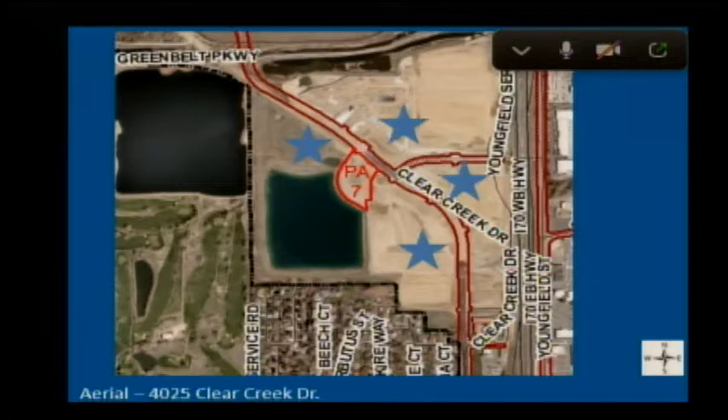A user has not yet been identified for the lot directly southwest, but the Lifetime site is just south of that. The internal roadway system and utility infrastructure connecting Hampton and Lifetime are on the west side of Clear Creek Drive, are moving through the permit process, and will likely be constructed in summer of 2022. Coors Pond lies directly to the west.

The subject site is located on the northern portion of Clear Creek Crossing Plan Development in Planning Area 7, which is also called the Harvest District, denoting this area as a commercial sub-district of the development. The site is surrounded by mixed use and commercial plan development zoning to the north, west, and south.

This request for SDP approval is the second step in a two-part process pertaining to plan developments. The first step occurred in 2018 when Planning Commission and City Council approved the Clear Creek Crossing Plan Mixed Use Outline Development Plan, which established the zoning. The zone change also included approval of a vision book that establishes the intended design and architectural themes and materials, as well as a design pattern book that includes the more substantive development regulations.

An Architectural Control Committee, or ACC, was established specifically for Clear Creek Crossing development to ensure compliance with the design pattern book, third-party review, consistency across the planned project, and to conduct schematic design review prior to the city's planning review. It's comprised of members of both the developer and city. The ACC has provided their recommendation of approval, which is attached in your staff report.

The applicant is requesting to build a 70,217 square foot, 4-story hotel on 3.59 acres. It's in Planning Area 7, or the Harvest District of Clear Creek Crossing, which includes the subject site. I'll show all of this that's outlined on the screen in more detail in the next few slides. The site does take into consideration adequate vehicular access, planning area connectivity, connections to the trail, and pedestrian connections to the north and south.

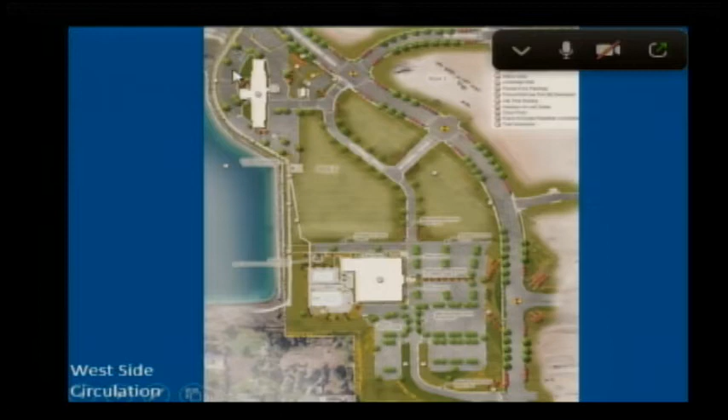A shared access connection is also provided to the south and to the west to provide that planning area connectivity. The site will also connect to the planned trail network on the west side.

The building is located central to the site and surrounded by a looped drive and parking. The SDP reflects 140 proposed parking spaces, including 5 accessible spaces and 20 bike parking spaces. The parking surrounds the building and is screened from Clear Creek Drive by landscaping. The Denver Water easement traverses the site along Clear Creek Drive, so this big easement there, which limits development in this area but allows for parking.

Bike parking is split between the 3 locations near the building, near the trail, and along Clear Creek Drive. The amount of parking provided complies with the design pattern book.

In terms of building orientation, there are no build-to requirements in Planning Area 7 within the Harvest District because of the grades and because of the Denver Water easement. A 20-foot setback is required along all sides. Setback requirements are imposed by the design pattern book, and the hotel complies with these standards. The primary building entry faces to the east, and usable areas for hotel residents lie on the west side. The SDP also complies with all grading, drainage, utilities, and traffic plans for the overall Clear Creek Crossing development.

Sanitary sewer and water service will be provided by Applewood Sanitation District and Consolidated Mutual Water Company, respectively. All internal site utilities will be privately owned and maintained by the Longs Peak Metro District and placed in utility easements, which are generally located beneath the drive aisles.

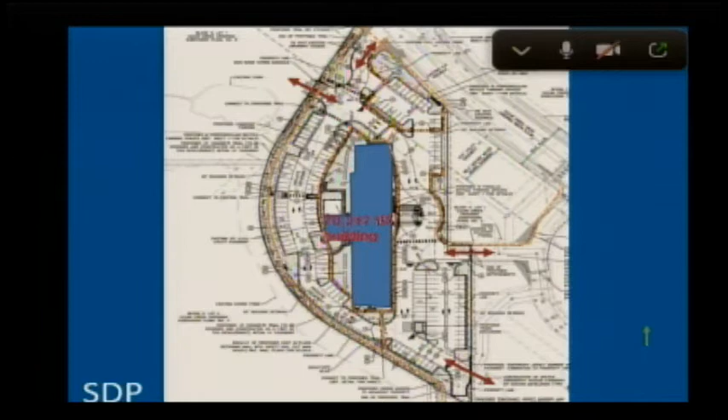A retaining wall borders the site to the southwest, starting approximately here, that's approximately 5 foot tall at its highest point, to be constructed to avoid steep slopes and provide a safe transition to the trail. Trail connections are proposed along the west side of the site and will be constructed by the master developer, Evergreen, under separate permit.

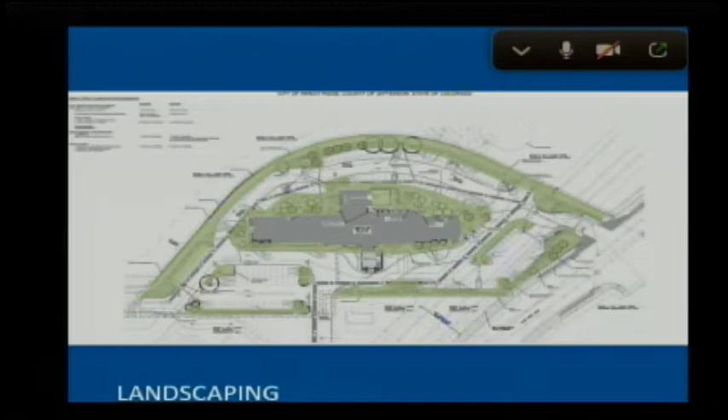The architectural style is driven by the Clear Creek Crossing Design Pattern Book and Vision Book, which calls for a modern agrarian aesthetic that blends traditional agrarian forms and materials with a modern feel. It also requires strong attention to be paid to the pedestrian realm.

The building is proposed to be approximately 57.5 feet tall, and the architecture is comprised of primarily brick, stone, wood, and cementitious siding with EIFS accents on the upper stories. The materials carry over on all sides of the building, resulting in four-sided architecture.

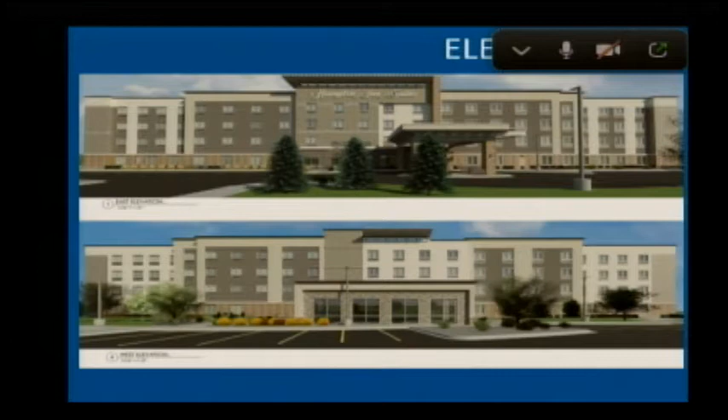The building contains a stone base to enhance the pedestrian realm, wooden awnings with corbels to enhance the entries, and ties into the agrarian theme. The western elevation incorporates similar stone and brick elements and wood accents as the front to improve the view from the trail. Overall facade transparency on the street-facing facade meets the requirements of the design pattern book. An analysis of the architecture in compliance with these standards is provided in the attached specific development plan.

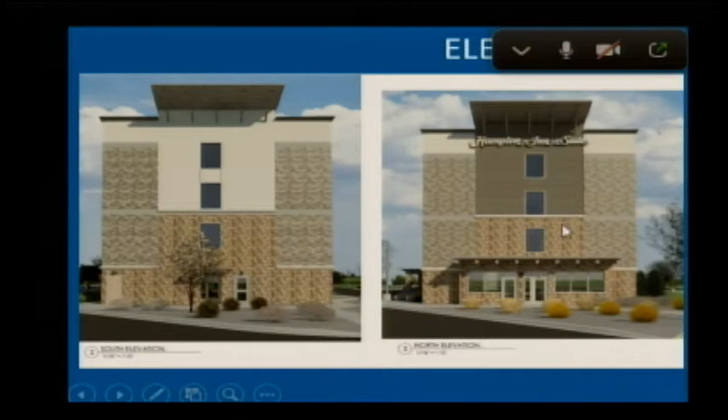Since Wheat Ridge is not a full-service city, we sent the application on referral to outside agencies as well as completed our internal review. We did not receive objections from outside agencies, and coordination with those districts is ongoing. Civil construction documents are nearing approval, and the plat is currently under review. A recommended condition of approval has been added to require the development agreement along with the SDP, mainly to memorialize the obligation for public improvements.

Before the hearing, the property was posted for 15 days, and letters were sent to property owners and residents within a 600-foot radius. The project was also posted to Wheat Ridge Speaks. One comment was received related to the perceived departure from the overall vision of Clear Creek Crossing. I'll let Evergreen respond to this comment during questions and answers, but to address it briefly, we do have the regulatory tools in place, and it just will take time to get there, but the vision is there, and we have the zoning as well.

So with that, staff finds that the SDP is consistent with the ODP and is in compliance with all standards set forth of the ODP, Clear Creek Crossing Design Pattern Book, and City Code. The SDP is consistent with the purpose of a planned development, and all agencies can serve the property. Therefore, staff is recommending approval of the specific development plan, WZ 2001, with the condition to require a development agreement.

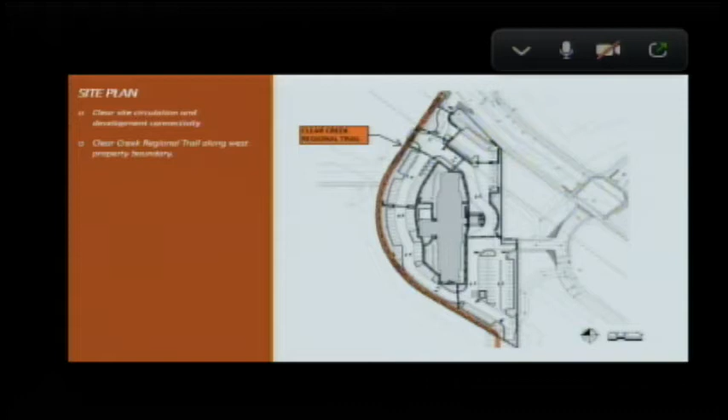Pedestrian and bicycle connectivity was an important factor in the site design. The Clear Creek Regional Trail proposed with this project has been made an integral part of the surrounding development by connecting Clear Creek Drive to the rest of the Harvest District via a multi-use trail. The project provides pedestrian connectivity throughout the site that links Clear Creek Drive to the Clear Creek Regional Trail.

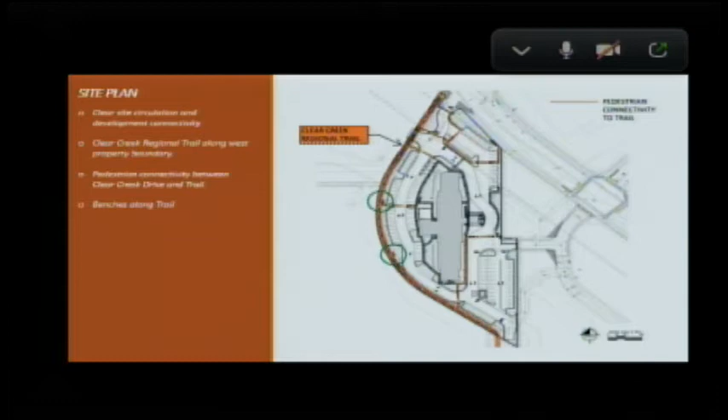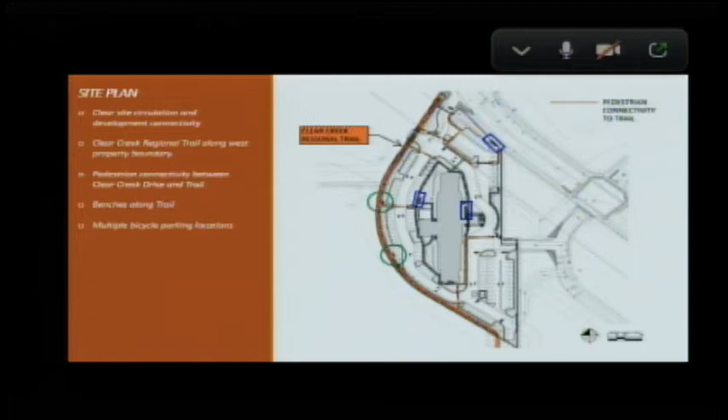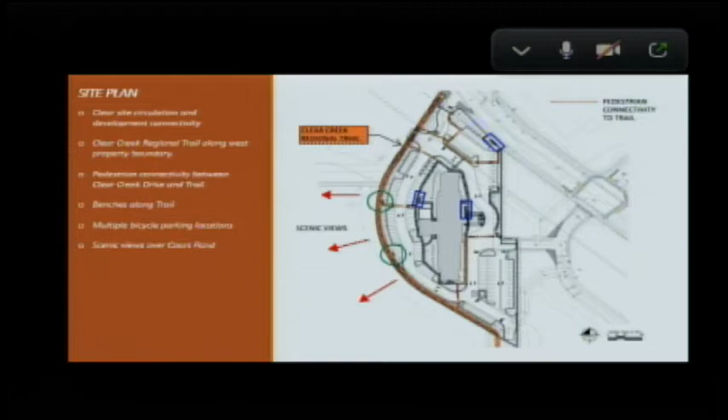The building orientation on the site provides scenic views of the Coors Pond and the Front Range skyline for 50% of the guest units, as well as the amenity areas, including the fitness room, the pool room, and the outdoor patio.

The project utilizes an enhanced landscape and site furnishing design. The site provides over 20% open space, which is in compliance with the minimum requirement for the Harvest District. Additionally, the site lighting fixtures and illumination were intentionally designed to complement the lighting of the surrounding development.

The photometric plan, which is included in the SDP package, provides substantial lighting for the parking areas and pedestrian paths, while limiting light pollution and intrusion onto other neighboring properties. Site furnishings have been selected in accordance with the design intent and theme of the design pattern book.

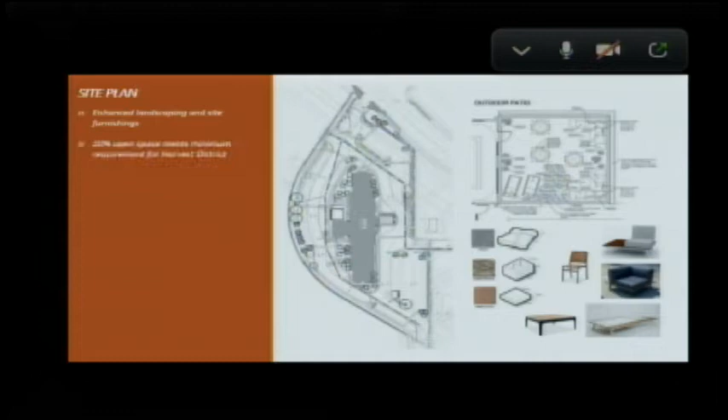The Hampton Inn Suites provides development continuity and a sense of place through building design. The building was designed with the modern agrarian design aesthetic of the development in mind and provides coherence with the landscape while accentuating the view corridor to the Coors Pond and the Front Range skyline.

The height of the building was kept 8 feet shorter than the maximum height allowed, which limits the effect on the view for the neighboring developments. The hotel height is similar to the height of the Lifetime Fitness Center at the southeast corner of the pond. The similar heights of these two buildings complement each other as anchors for the Harvest District.

A pedestrian-friendly street environment was emphasized with over 40% of the facade facing public right-of-way, being transparent to encourage pedestrian traffic throughout the site.

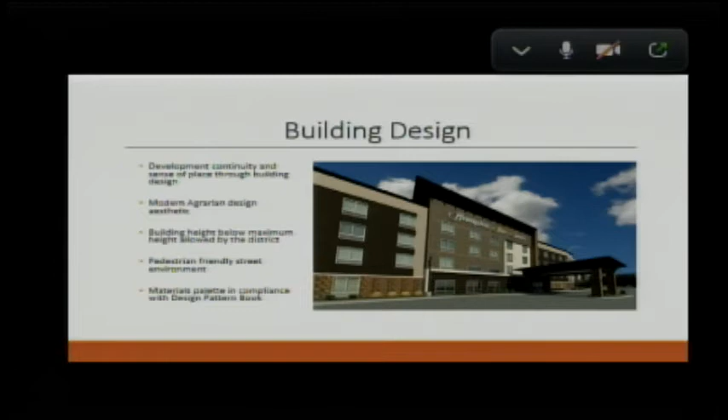The project utilizes a variety of materials to comply with the design pattern book. These materials include natural look river rock stone veneer, brick and EIFS in soft natural colors, with contrasting fiber cement panel siding representing dark toned wood.

The building is grounded by the natural stone base. Building corners are accented by the contrasting brick veneer, which provides visual anchors for each elevation. The long east and west facades are articulated by building massing with varying parapet heights and cornice projection details, as well as differentiating materials and colors.

The primary building entry location at the east elevation is emphasized by projection in building massing, use of the contrasting brick, and architectural wood roof canopy feature.

This entrance is further designated by a drive-under canopy with decorative wood cornice detailing to complement the roof structure. This canopy provides a clear, identifiable entry point for guests, while it provides shade and enhances the pedestrian experience.

Similarly, secondary building entry locations at the north and south are emphasized by extending the grounding stone base vertically to the third floor line and repeating the architectural wood canopy feature at the roof.

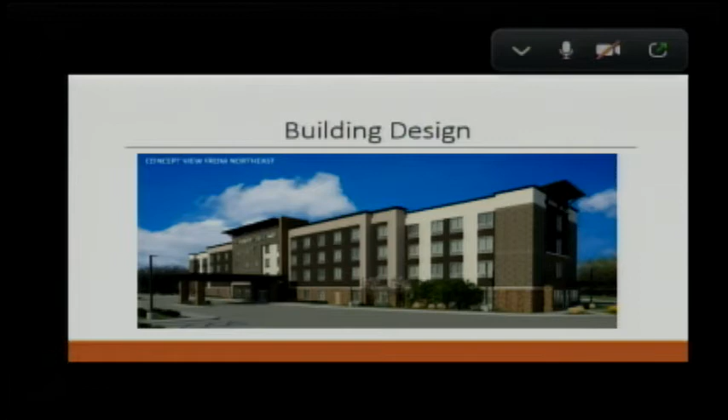With the north elevation facing Clear Creek Drive, additional detailing was provided. The wood look siding is used at the upper levels in lieu of EIFS, and an additional building projection with architectural wood canopy at the first level provides improved pedestrian scale and connectivity.

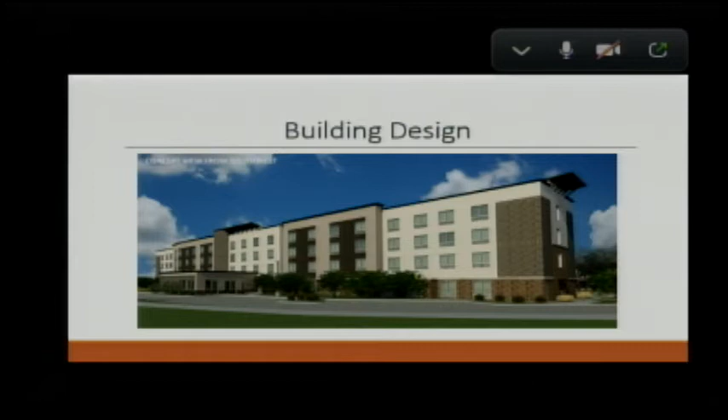The west elevation is the main view from the trail. The single-story pool building increases human scale for this facade. The central brick tower with an architectural wood canopy feature at the roof provide visual interest for pedestrians on the trail, as well as provides a cohesive, consistent design around all four sides of the building.

Inside the hotel, our front desk area will feature a welcome message designed to share the spirit of the surrounding community. Interior finishes are both modern and warm.

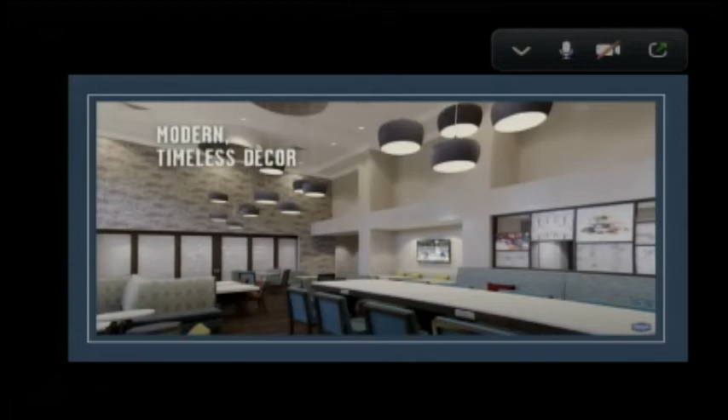Our gathering space features large windows to bring in natural light. Guests will be able to enjoy amenities such as complimentary coffee and breakfast, market, fitness room, and indoor pool. Everything about the Hampton Inn Suites is designed to make guests feel welcomed and comfortable, including our well-appointed rooms that meet the needs of families and business travelers alike.

In closing, Brent Hospitality Group does not take its commitment to your community or our team lightly. We bring a high level of integrity and a spirit of hospitality wherever we choose to grow. We are excited for this opportunity to make the Hampton Inn Suites a part of the Clear Creek Crossing development and look forward to answering any questions and presenting to the commission here tonight. If approved, we would like to break ground in late summer of 2022 and open the hotel in the fall of 2023. Thank you.

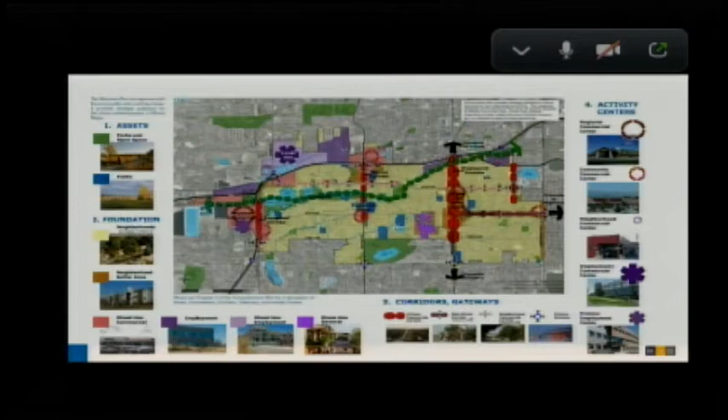When we start any planning process of this scale or this nature, we start with the comprehensive plan to look at what existing guidance is on the books for a particular sub-area. You can see here that a lot of the assets and foundational elements identified as part of the structure plan, which is intended to guide strategic future development for Wheat Ridge, are represented in this area, from neighborhoods and neighborhood buffer areas to a couple of key existing nodes around mixed-use commercial and employment. You'll see corridor designations for commercial corridors, both at the neighborhood and primary scale, as well as a few commercial centers distributed throughout.

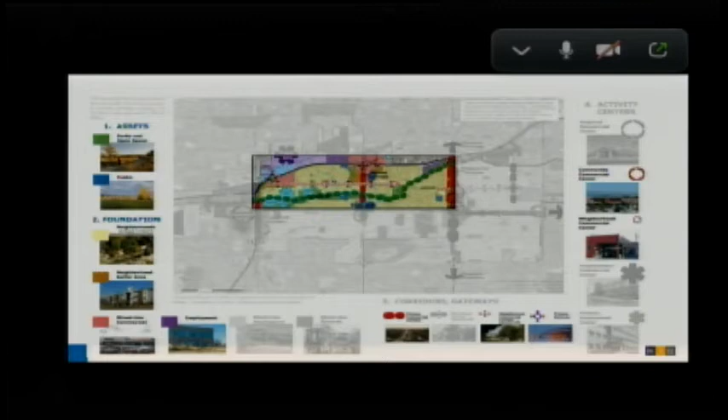Other plan documentation, it's been a few years now with the NRS. I don't need to tell you all about the NRS, but as it relates to this particular project, the priority recommendations that this project does a great job of implementing are around corridors and neighborhoods. One of those from the NRS was to complete a corridor plan for 44th Avenue from Wadsworth to Youngfield. We got close, right? But we are looking much more comprehensively at the interrelationship between the corridor and the surrounding land uses, existing neighborhoods, and the like.

And on the neighborhood side, designing neighborhood-appropriate based engagement. So it's taking the momentum and energy that the Let's Talk program first codified coming out of the NRS, and knowing that Fruitdale and Anderson Park were finishing up their engagement blitzes as we were getting underway, it was a great time to segue from near-term priorities and action items that the Let's Talk program identified to a larger long-term 20-year vision for a sub-area plan.

Another plan that we look to when we start is the existing plan documentation at a sub-area level. So the Fruitdale sub-area plan, which encompasses about a third of the overall geography that we're looking at. A lot's changed since this was adopted, right? There's been two recessions, there's been a global plague. So some of the context obviously has evolved.

That being said, a lot of those primary concepts are still the same issues that we're dealing with today. So it's concepts that were identified in the Fruitdale plan around revitalization and redevelopment of 44th Avenue, the desire to improve and maintain the conditions of properties both on the residential and commercial side throughout the area, prioritizing pedestrian safety and traffic flow, and then leveraging, as Jay mentioned in the approach to the project, those existing community assets from all of the great parks, Prospect, Anderson, Fruitdale, the historic park, Baugh House, all the great things that the area already has, using those as existing anchors to think about stability and change moving forward.

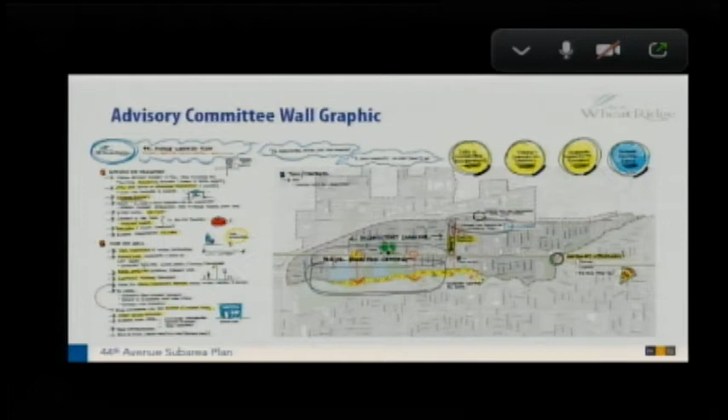Focus groups on a mural board, so a little more live transcription of important areas. You can see that clustering of orange, or concerned notes, over towards the truck stop. You can see other aspects these focus groups are noting in terms of importance of preservation and change.

The themes from those conversations were about supporting the existing character through compatible development and, where appropriate, preservation in certain areas; safe and signalized crossings along 44th, knowing that there's a 1.5 mile stretch of no signals from Kipling down to the on-ramp past Tabor.

Supporting and expanding on local retail - we have great businesses there today, but there's the idea that more business could be attracted to support the needs of existing community members, and we're working through all the ways to achieve that. As I mentioned, safety once more, and then that last piece: defining those areas of potential change or economic development to support either new residential or new retail, but maintaining a vision focused on character, safety, and experience.

Last few slides here on the engagement side, and I'll hand it to Jay to wrap up. Going into big buckets, right - we have a bucket of findings from the analysis, another one from themes from the engagement. If we were to try to aggregate all of that into three more buckets, we would have one being a comprehensive investment of 44th Avenue.

So thematically, some of the things we're hearing is potentially considering more of a focus of mixed use or commercial east of Kipling and more of a residential and neighborhood focus west of Kipling. Thinking about gateway and connective infrastructure at the major crossings—Clear Creek Crossing there, note the little c, so the crossing of Clear Creek itself, not the actual development. And then public and private realm reinvestment, multifaceted from pedestrian bicycle safety, tree canopy, and things of that nature. Right in front of Swiss Flower, Heidi's shop, that's a great example of private development coming to support the public realm.